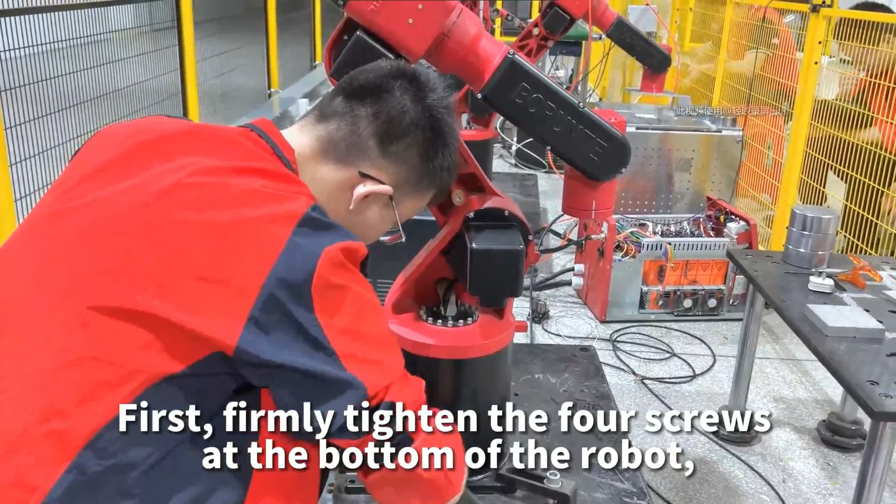Firmly tighten the 4 screws at the bottom of the robot. Open the crimp contacts protection cover. Connect the heavy load connecting line to the robot. Screw in and fix it. Complete the connection between the robot and the control cabinet.

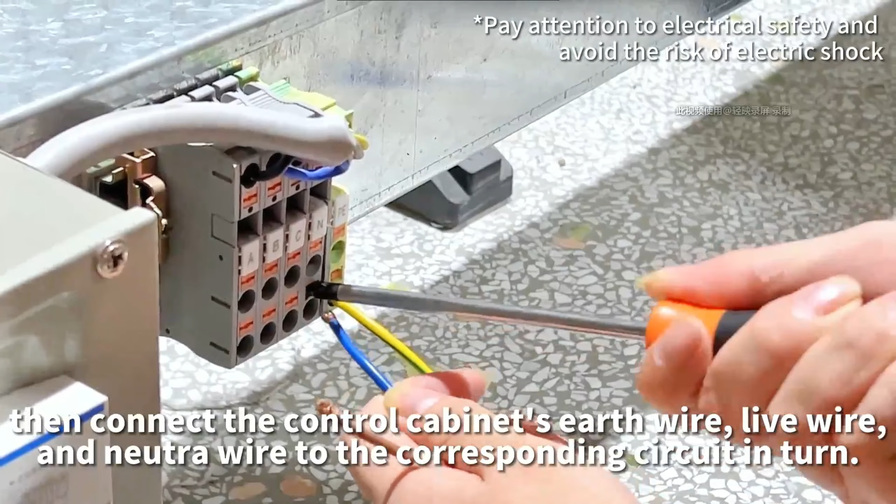Next, insert the teaching pendant connection cable into the teaching pendant connector on the upper right side of the back of the control cabinet and tighten it. Then connect the control cabinet's earth wire, live wire, and neutral wire to the corresponding circuit in turn. The connection between the robot and teaching pendant and the control cabinet is completed.

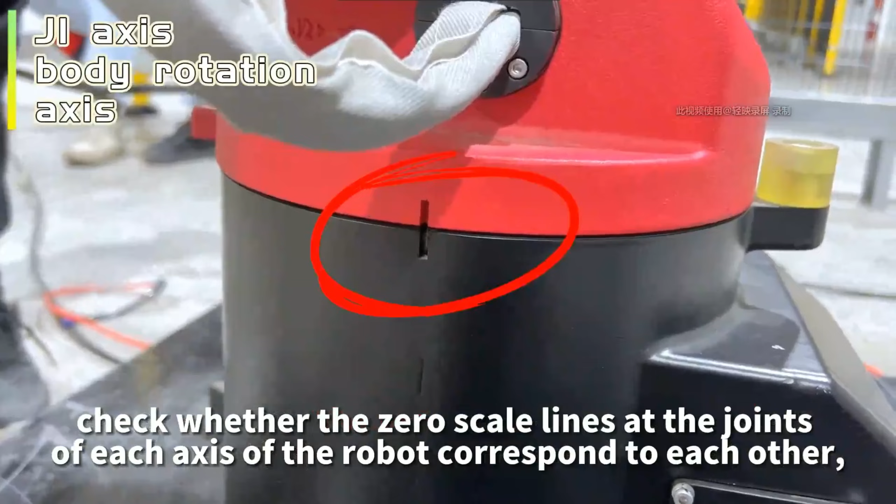Upward open the control cabinet switch. Wait for the teaching pendant to start and perform the home point resetting operation. Check whether the 0 scale lines at the joints of each axis of the robot correspond to each other. After checking, the robot can be used normally.

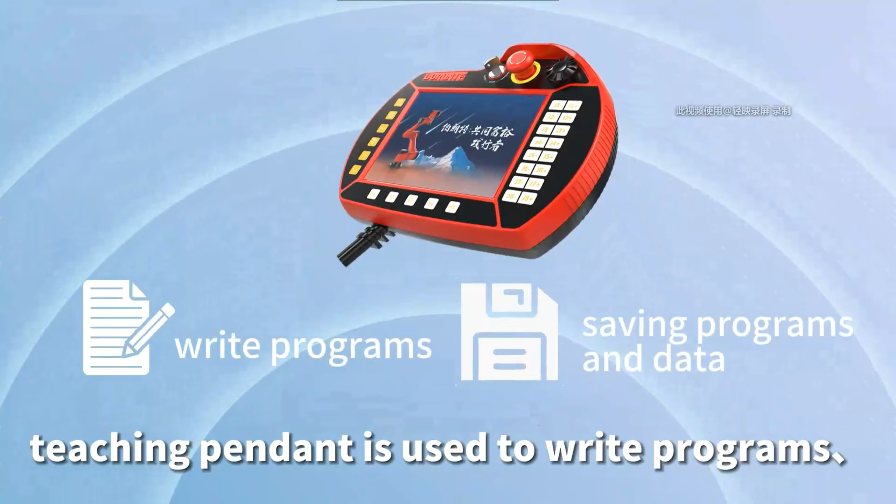Borunte robot includes robot body, teaching pendant, and control cabinet. The teaching pendant sends the demand to the control cabinet. The control cabinet will drive the robot moving based on the received signal. First, let's see the teaching pendant. The teaching pendant is used to write programs, saving programs and data.

At the left rear of the teaching pendant is a USB interface that can be used to transfer data, programs, etc. At the rear right is the Enable button. When writing a program, you need to press and hold the Enable button to move the robot. This is the front of our Borunte robot teaching device.

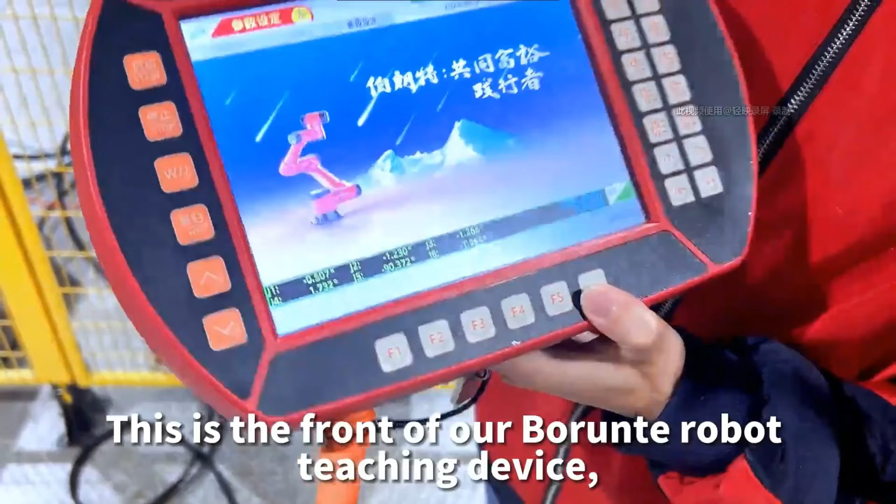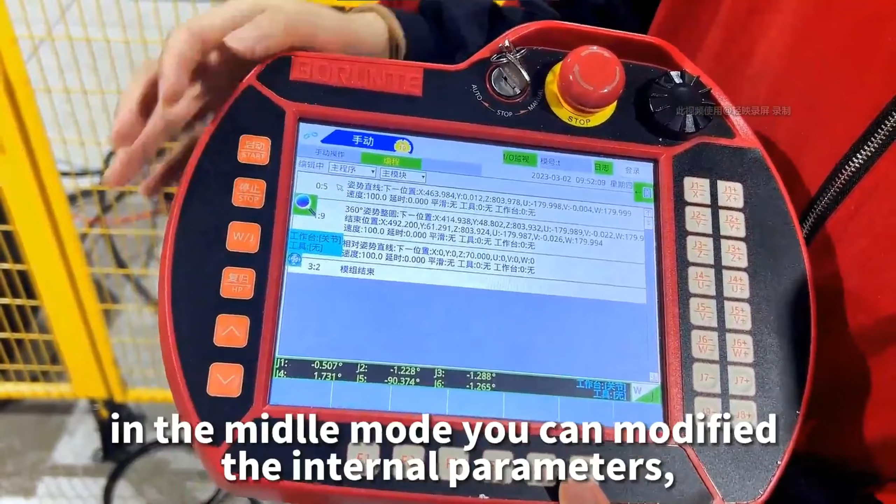The key can switch the operation status of the robot. There are 3 status keys in total. In the middle gear is our main interface. On the left is the automatic state. On the right is manual mode. In manual mode you can write and modify programs to move the robot. In the middle mode you can modify the internal parameters. In automatic mode, the robot can operate the program we need.

The red button next to it is the emergency stop button of our teaching pendant. Press it immediately in case of operation error. The robot will stop immediately. The black disc on the right is a fine-tuning knob. It can make subtle adjustments to the coordinates of each axis.

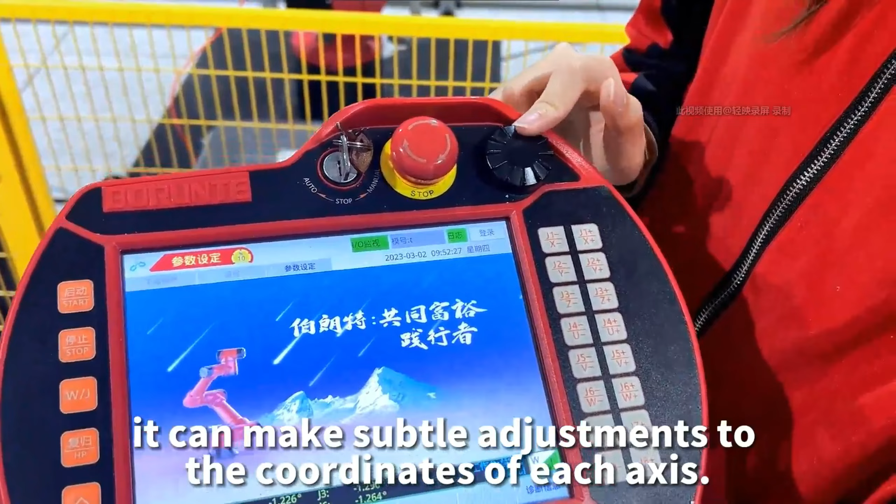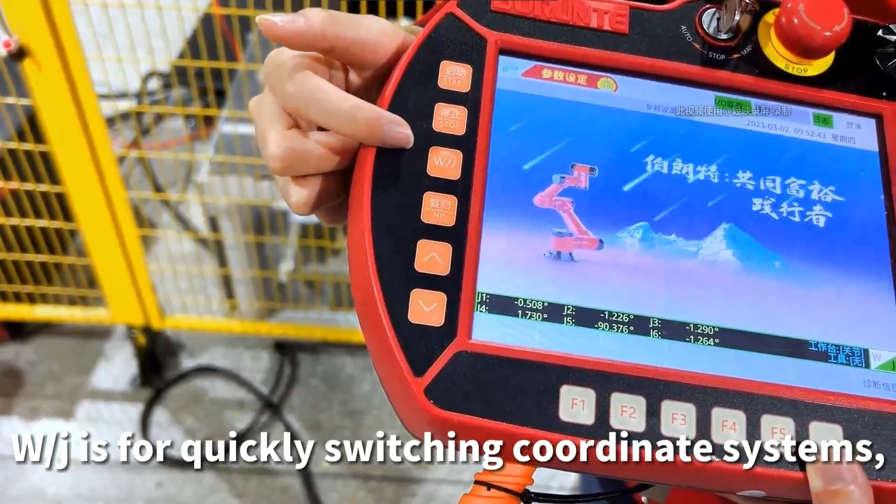The orange buttons on the left side are Start, Stop, WJ, Reset, Acceleration, Deceleration in sequence. Start and Stop buttons are used to control a written program and the operation of the robot. WJ is for quickly switching coordinate systems. W represents the world coordinate system. J represents the joint coordinate system. The reset button can restore robot actions to the robot standby point. The acceleration and deceleration buttons can control robot running speed.

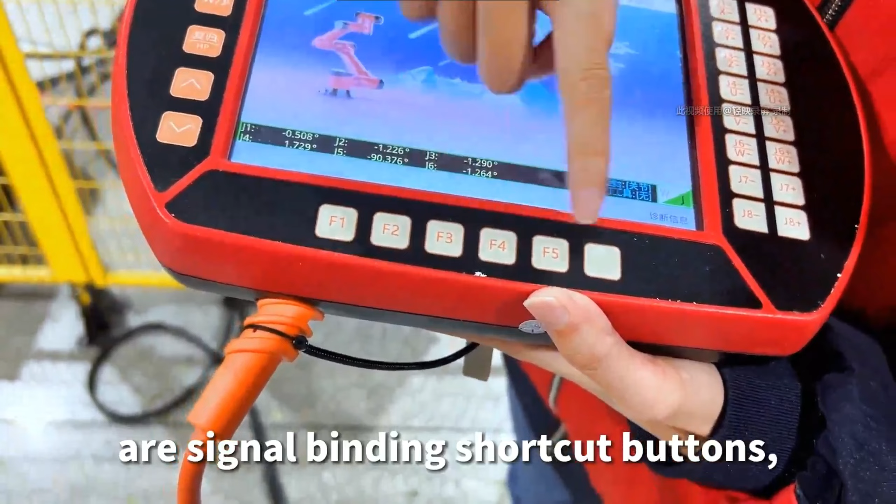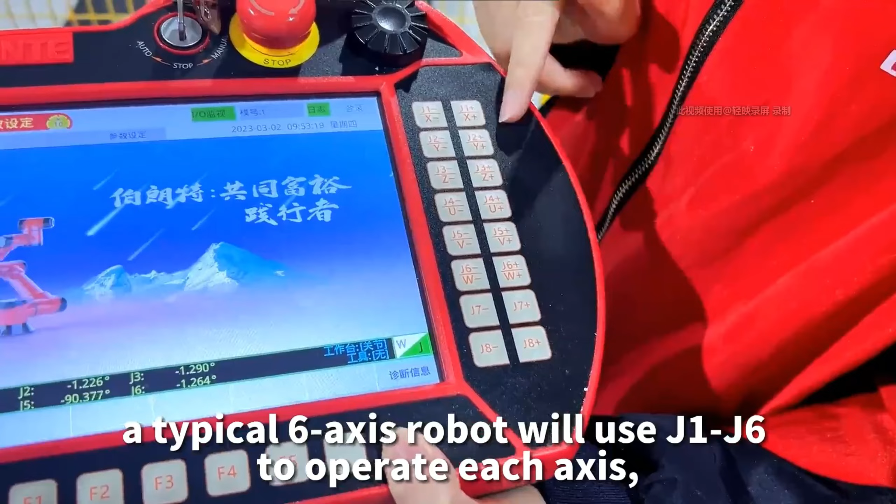F1 to F5 and the white button are signal binding shortcut buttons. They can be used to calibrate screen test keys or set custom function keys, acting as shortcut keys. On the right side, J1 to J8 are axis buttons, controlling the action of each axis. The teaching pendant can control 8 axes. A typical 6-axis robot will use J1 to J6 to operate each axis. J7 and J8 can bind additional axes.

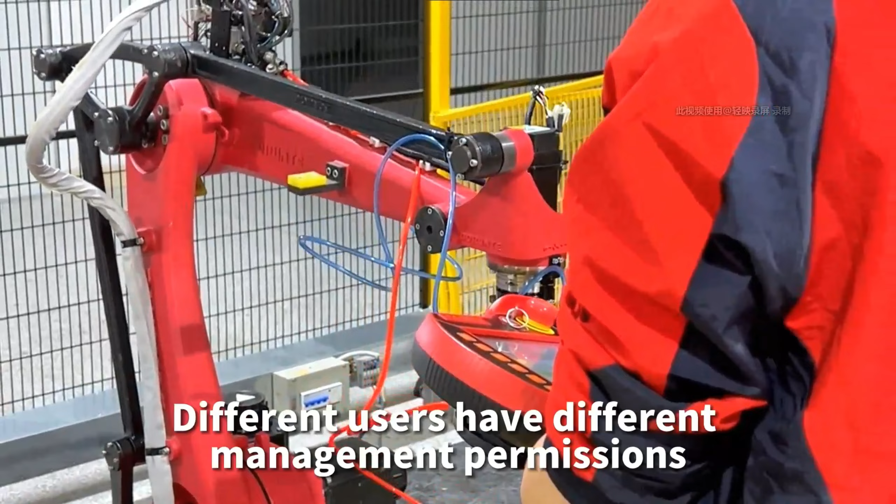The line below is the signal connecting line between the teaching pendant and control cabinet. There is a touch pen on the back for easy manipulation of the teaching pendant. The first step is login. You can operate the robot and set up the system after login. Different users have different management permissions.

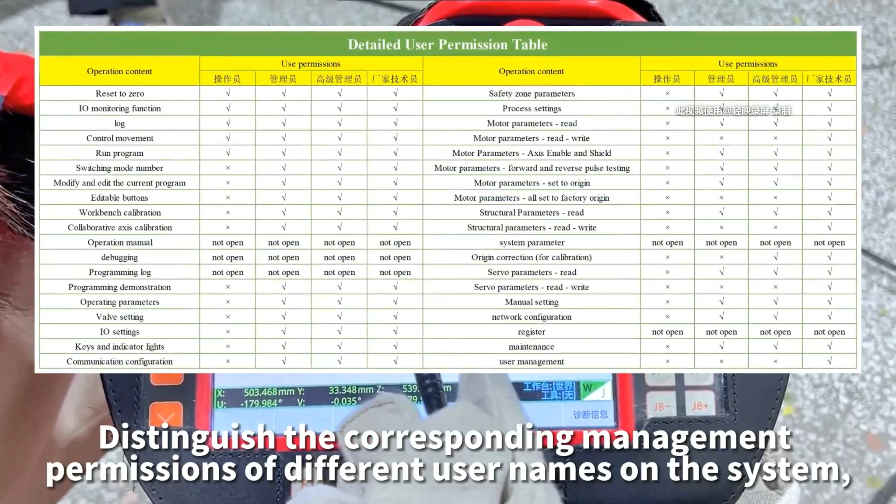Firstly, it is the home screen. Click Login. The first line is User. Click the black triangle. You can see several login methods that come with the system. The default passwords and permissions for our system are as follows. Distinguish the corresponding management permissions of different usernames on the system. Refer to the following figure for details.

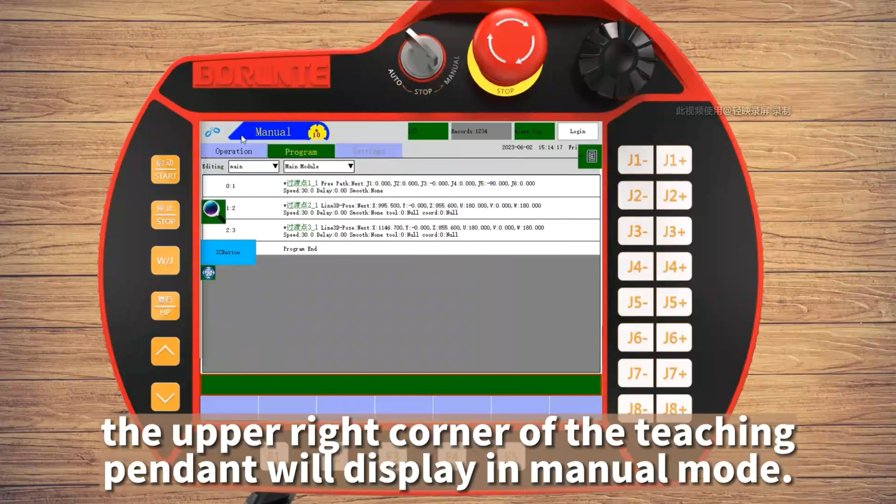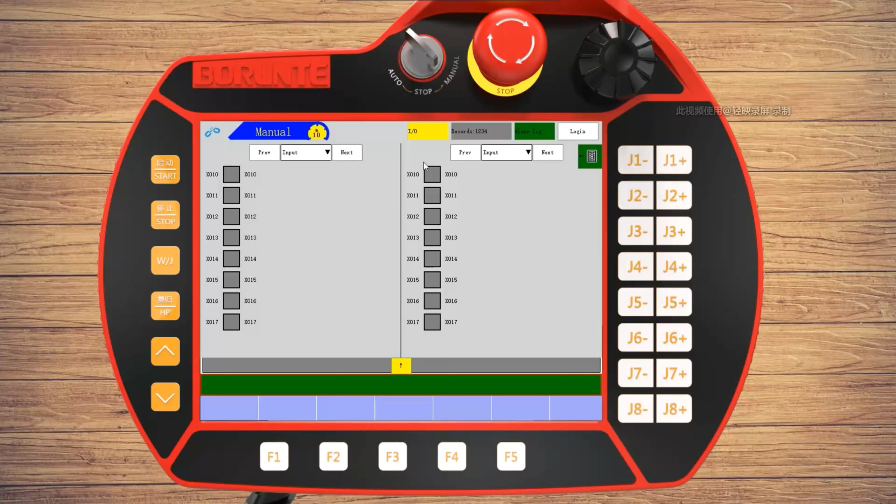First, shift the key to manual gear. The upper right corner of the teaching pendant will display manual mode. Next, let's take a look at I/O monitoring. This monitoring page allows for real-time viewing of monitoring related information, including input and output, intermediate variables, servo monitoring, data in memory, welding data, and so on. Click I/O monitoring to pop up the window. Click again to retract the window.

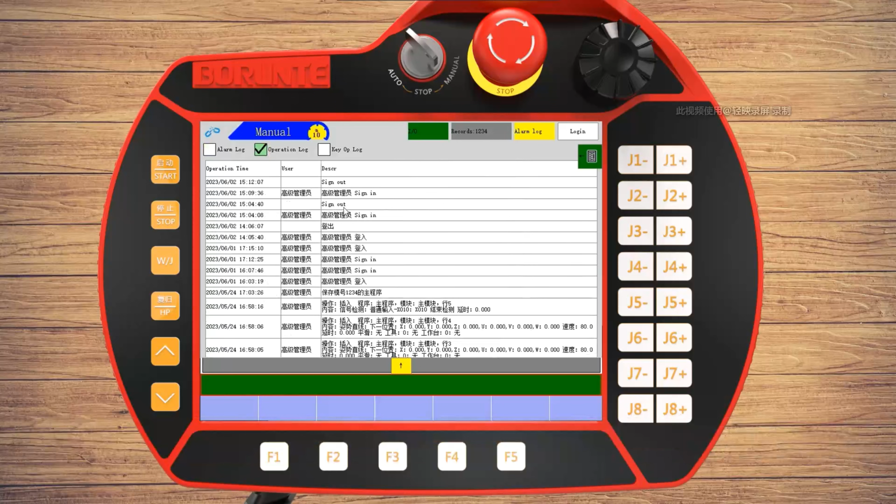Secondly, we can check monitoring information in the logs. Here we can monitor alarm records, operation records, and button records. The alarm record page records information on robot abnormal alarms. The operation record page records operational records. Key recording page.

Record button or switch operation records. Same as I/O monitoring. Click on the log again to zoom back to the programming page. If you want to view or modify the module number, clicking on the module number directly is not allowed to view it. We need to log in first.

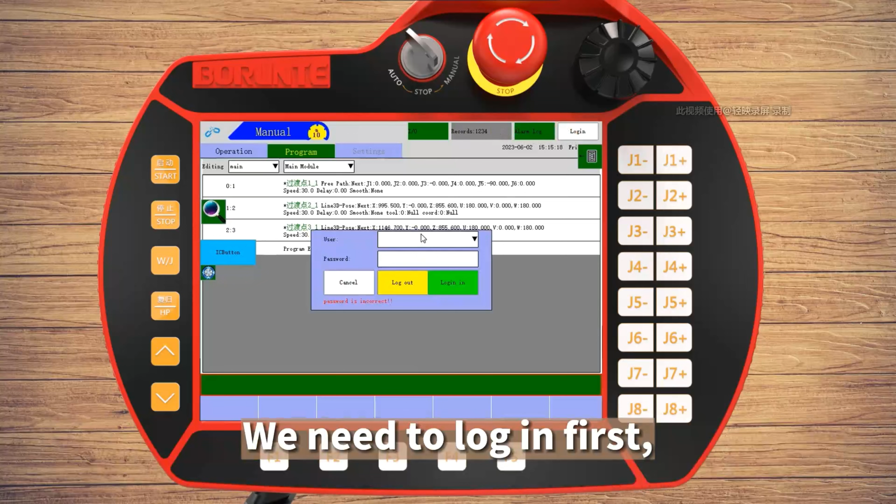User select Senior Administrator. Password 1, 2, 3, 4, 5, 6. After logging in, we can view or operate on the module number. For example, creating a new module number or loading a module number. We can also import the module number from USB or export the module to USB.

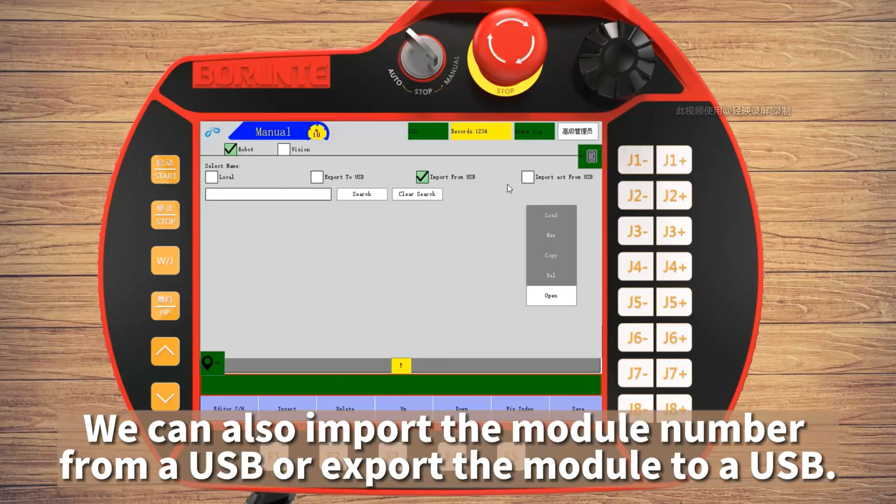Click on the module number again. Return to the programming interface. In the programming interface, you can view and write programs. We will explain it in detail in the upcoming class content.

The robot joint coordinate system is used to control the motion of each joint, and different robot joint types also vary. We can switch coordinates through the WJ button on the left side of the teaching pendant. J represents joint coordinates. W represents world coordinates.

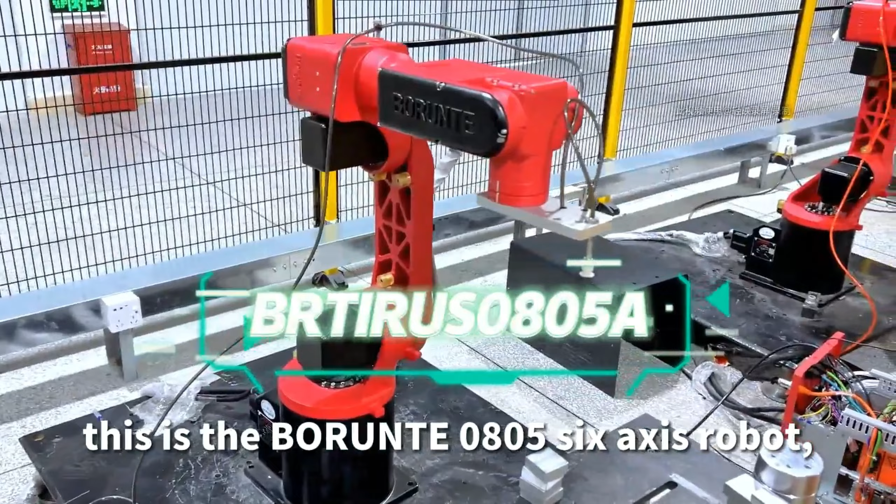Next, let's practice. This is the BORUNTE 0805 six axis robot. First, log into the Senior Administrator and turn the key to manual mode. We can see that the workbench on the left displays world coordinates. Click the WJ button to switch to joint coordinates. Now, we can operate the J1 to J6 buttons on the right side of the teaching pendant through the Enable button to operate the corresponding axis.

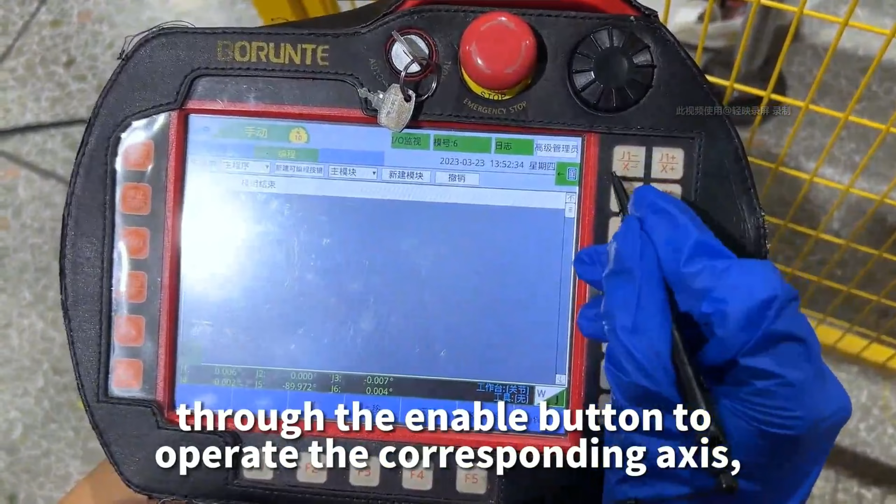We can see that its one axis has a degree of freedom of plus or minus 170 degrees. Its two axis has a degree of freedom from minus 98 degrees to plus 80 degrees. Its three axis has a degree of freedom from minus 80 degrees to plus 95 degrees. Its four axis has a degree of freedom of plus or minus 180 degrees. Its 5 axis has a degree of freedom of plus or minus 120 degrees. Its 6 axis has a degree of freedom of plus or minus 360 degrees.

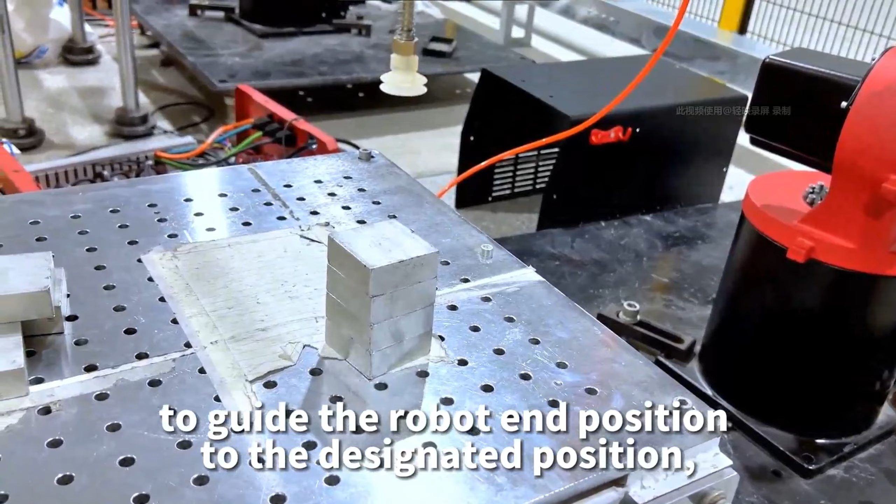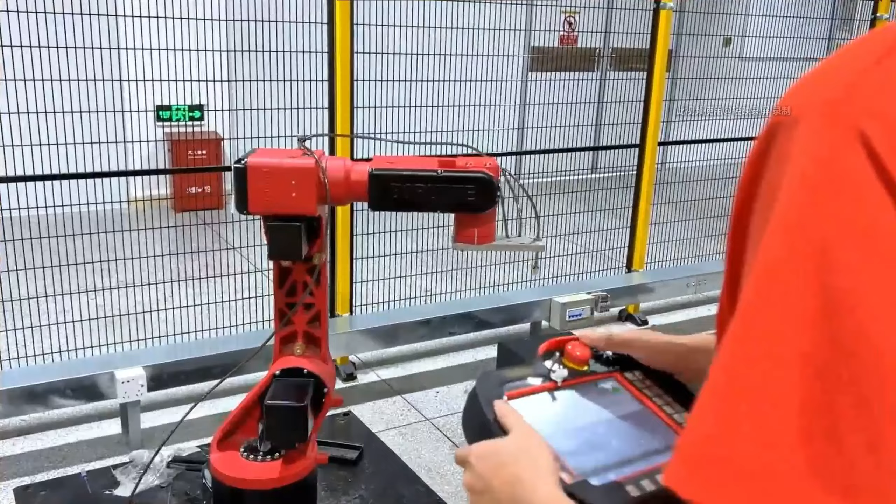If you want to move the robot end position to the desired position in the joint coordinate system, it can sequentially move each joint to guide the robot end position to the designated position. Take the one-axis joint movement as an example. We can set a starting point first. Click Set the End Point. Click Insert. Press J1+. Turn the robot to the point where we need it. Click again to set the end point. Click Insert. Then we come to the automatic interface and run the robot motion between the points we just wrote. We can see that one axis has already repeated its work according to the path we have set up.

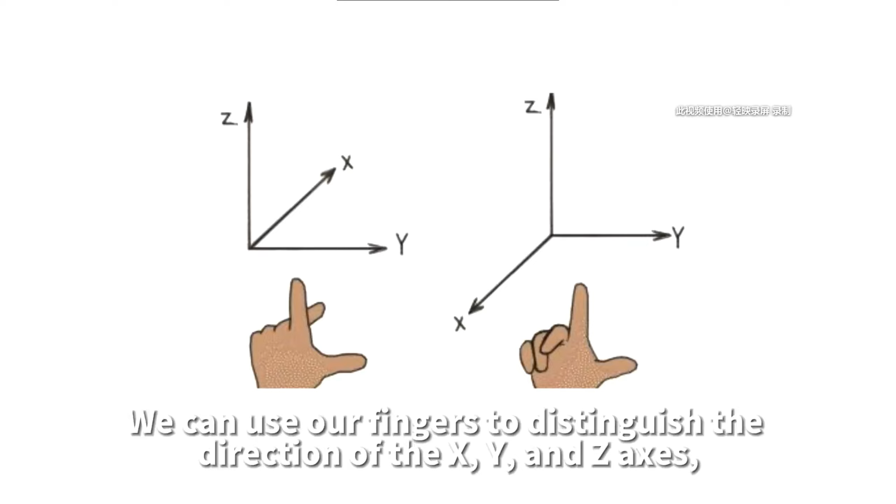The Cartesian coordinate system is used to describe the movement of the robot body based on the robot mounting base. This coordinate system is composed of the mutually perpendicular x, y, and z axes. It is the basic coordinate system necessary for robot motion in three-dimensional space, and it is also the most commonly used coordinate system. We can use our fingers to distinguish the direction of the x, y, and z axes.

The operator faces the robot and extends the left hand to gesture, with the middle finger facing yourself. The middle finger represents the x-axis for controlling the forward and backward robot motion. The index finger is horizontal, representing the y-axis for controlling the left and right robot motion. The thumb is facing upwards, representing the z-axis for controlling the up and down robot motion.

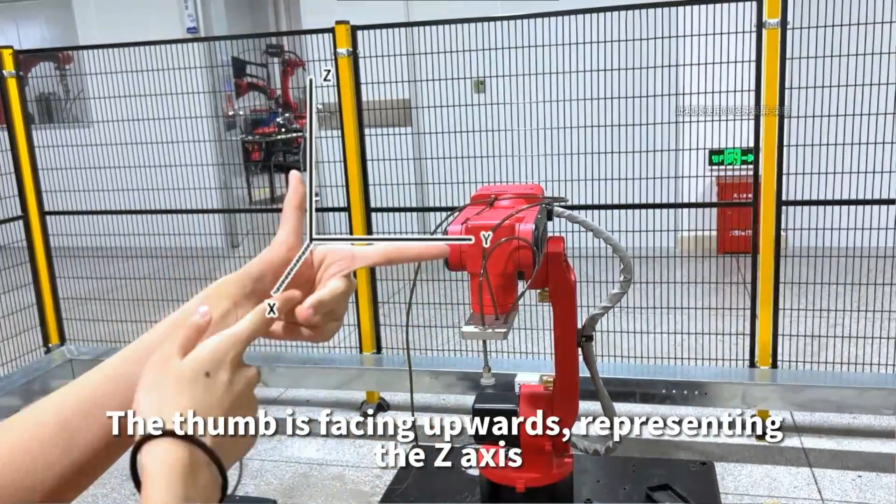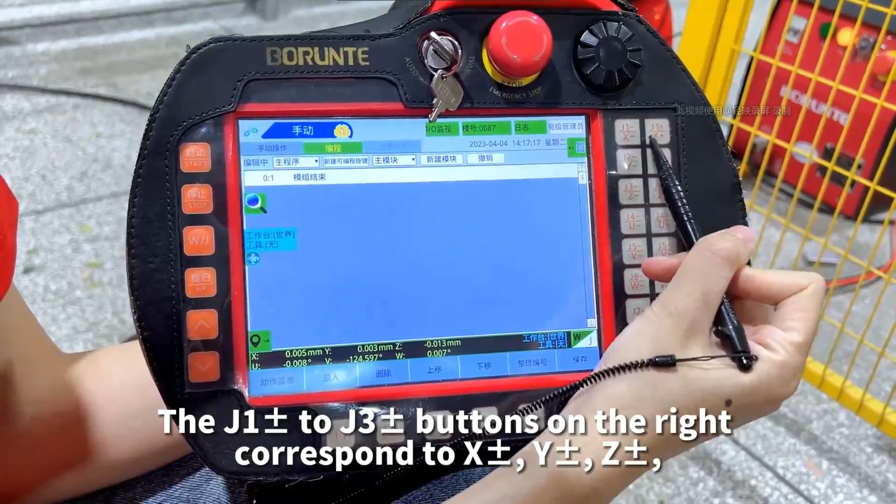Next, enter the practical operation. Turn the teaching pendant to the manual interface. We can see that the workbench on the left usually defaults to the world coordinate system. If not, we can switch through the WJ button. The positive and negative J1 to J3 buttons on the right correspond to positive and negative XYZ.

X negative is for controlling a backward robot movement. X positive is for controlling a forward robot movement. Y negative is for controlling a leftward robot movement. Y positive is for controlling a rightward robot movement. Z negative is for controlling a downward robot movement. Z positive is for controlling an upward robot movement.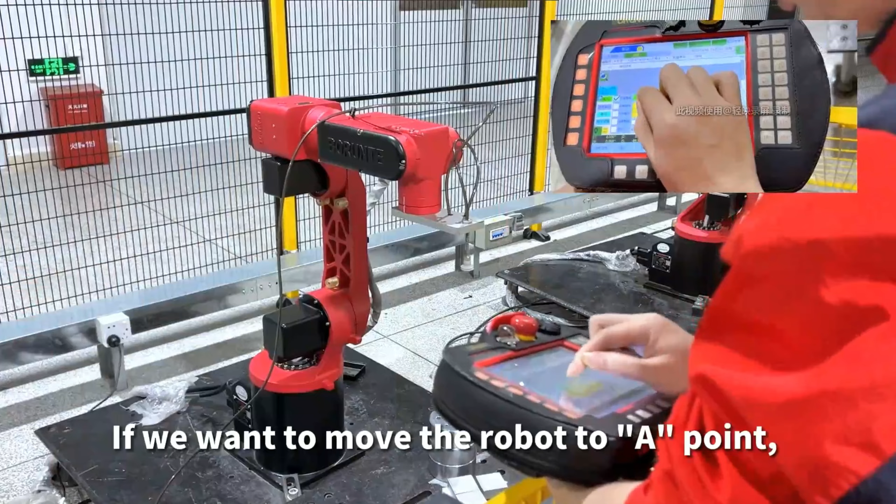If we want to move the robot to point A, first, set an initial position, click Set the End Point, click Insert. Then we use world coordinates to move the robot to point A. Click Set the End Point again, click Insert. Turn to the automatic interface to move. This is how the robot motion between points is achieved through world coordinates.

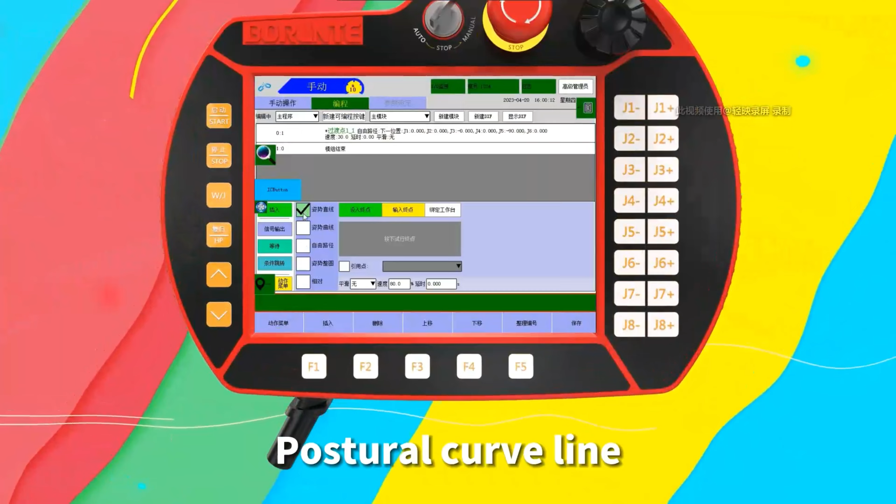An instruction can be understood as a control command that enables a robot to move to a specific position. The motion instructions of the BORUNTE robot are mainly divided into 5 types. They are posture straight line, posture curved line, free path, posture rounding and relative instruction.

Before learning the specific contents, we have to know the 3 factors affecting instruction speed. The first factor is axis speed. Axis speed refers to the maximum speed set by the servo of each joint of the robot. It can be found in the product introduction on the official website or the product technical recommendation.

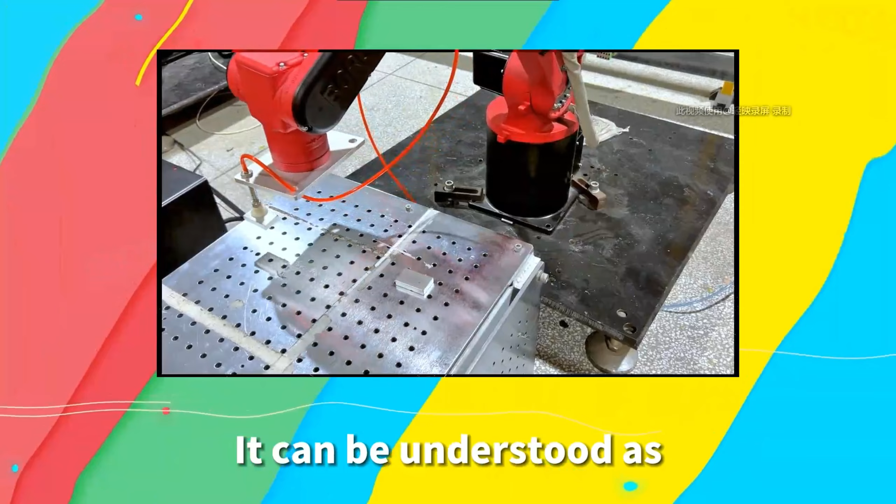The second factor is path speed. Path speed refers to the speed multiplier set in a single path program line. It can be understood as, when the robot is moving on a trajectory, the percentage of axis speed on this trajectory. The path speed can be modified when path programming.

The third factor is speed multiplier. It is the percentage of the robot's entire speed. We can click on the upper left corner of the teaching pendant to view it. The default setting is 10%. That is 10% of the robot's axis speed, which can be changed according to actual application scenarios.

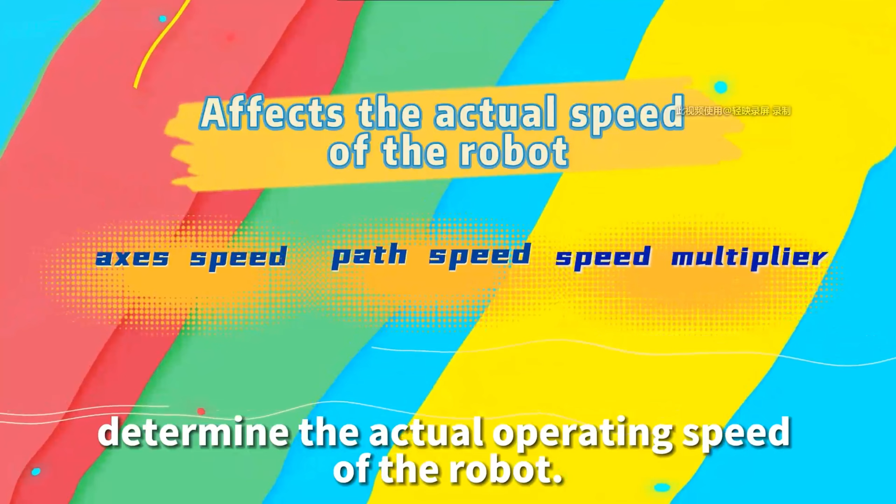The above 3 factors: axis speed, path speed, speed multiplier determine the actual operating speed of the robot. When we want to measure the actual speed of a robot at a certain joint or in a straight line, we can use maximum speed multiply path speed multiply speed multiplier. This formula is used for calculation. During normal operation, we can control the speed of robot movement by changing the path speed

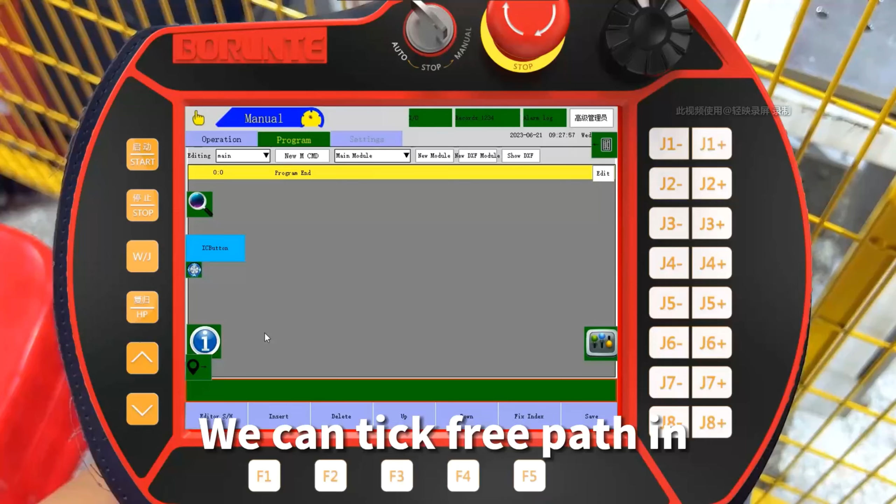or speed multiplier. Free path uses the joint interpolation method to move to the teaching position. The speed of each joint follows: axis speed multiply path speed multiply speed multiplier. To operate, we can tick free path in editor, path. To operate robot movements, the right option box contains all parameter settings for free path.

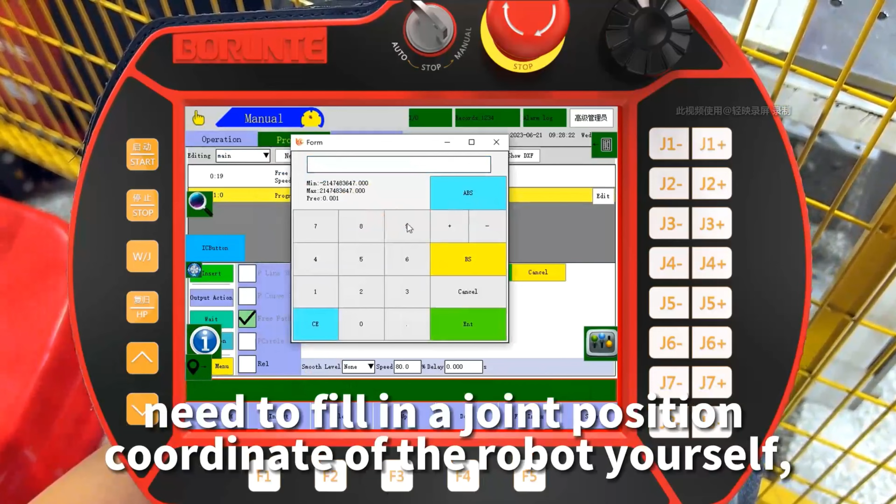We can first look at the 2 options above: set endpoint and input endpoint. Set endpoint directly records the current joint position coordinates of the robot. Input endpoint needs you to fill in a joint position coordinate of the robot yourself. These 2 methods are selected and used according to the actual scenario needs.

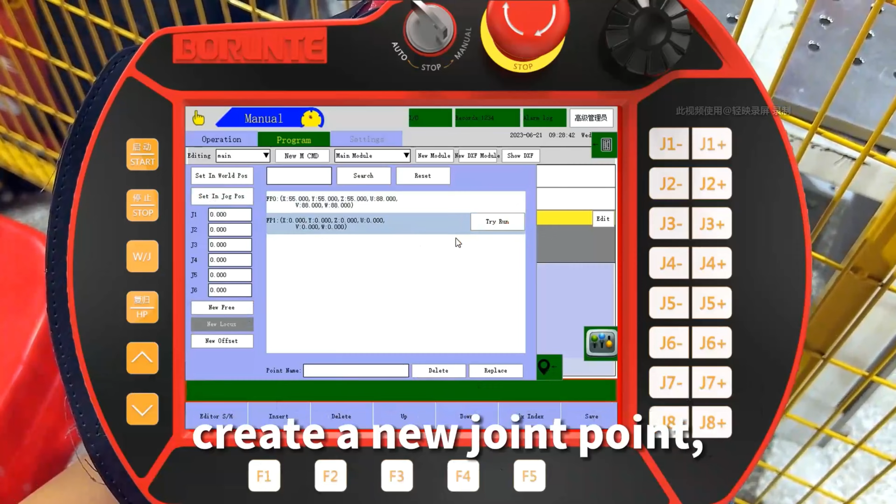Below there is select point. It can reference previously created joint positions. After ticking, directly insert the point data. We can enter the point setting interface by clicking the green button in the bottom left corner. Click Set in Joint Position. Create a new joint point, and we have recorded a reference point.

Smooth level refers to the smoothness of the connection between points during the robot's movement process. Default is no smooth. We can see that when the smooth level is none, the robot will move to the set point position and then move to the next point. After setting smooth level, the robot will transition the set points in a smooth manner. It can reduce pauses between points.

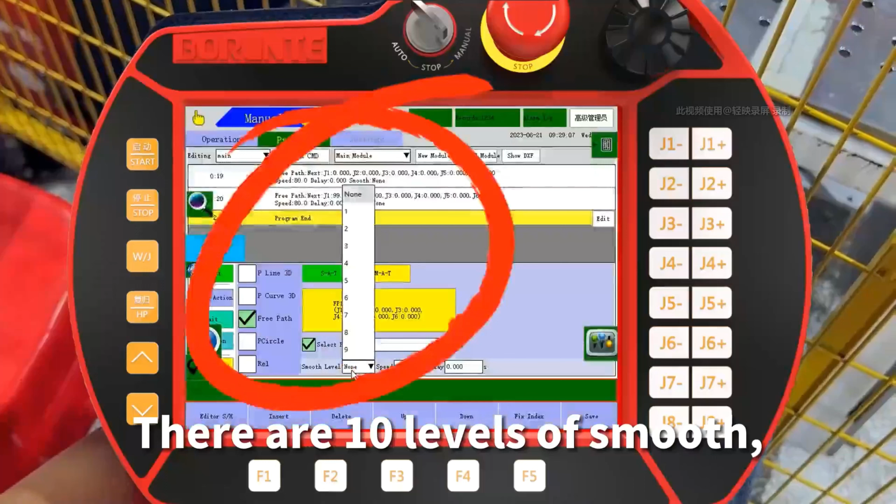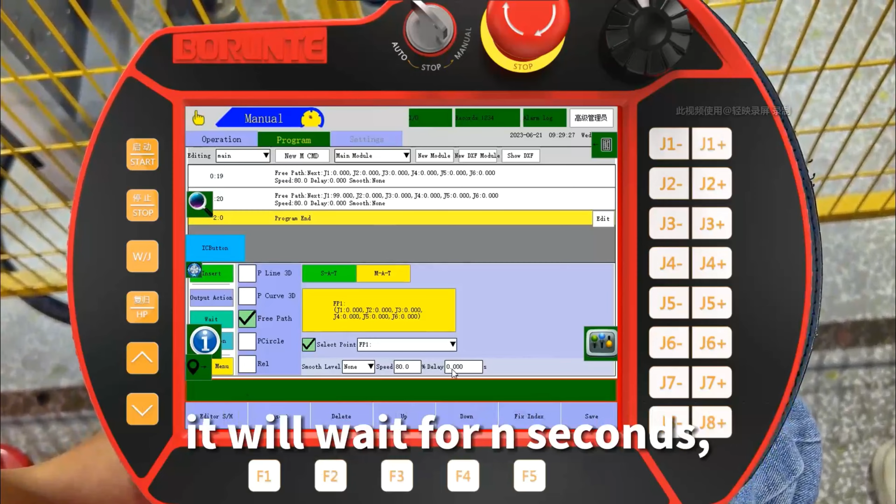There are 10 levels of smooth. The higher the smoothness, the lower the accuracy of the trajectory. The robot moving position is most accurate when there is no smooth. The speed is the path speed. It is the speed multiplier set in the single path program line. Delay is when the robot reaches the finish point, it will wait for n seconds. The default is 0 seconds. Above are all the parameter settings for the free path.

When choosing free path, it is necessary to pay attention to its motion trajectory characteristics. It is actually presented as an arc, but if the 2 points you set are in a straight line and you choose free path, the final effect presented is still an arc. It is because there is only an angle operation relationship between the points in the free path.

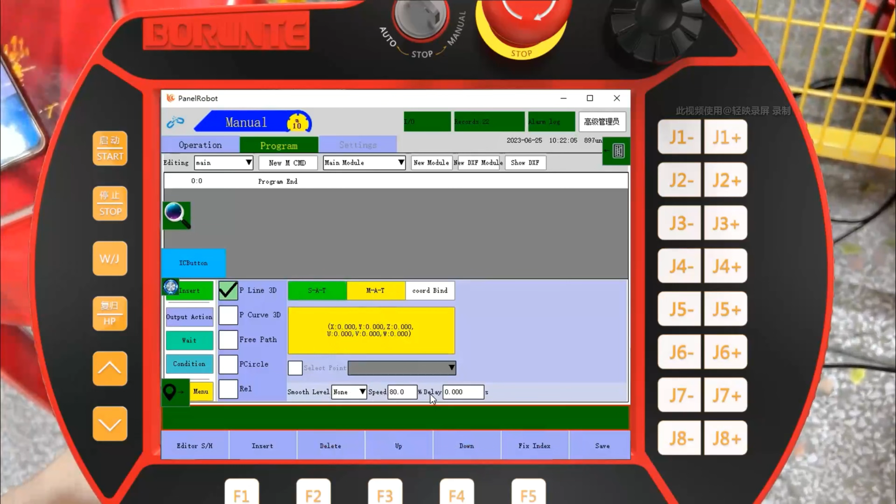The posture line is also the most commonly used instruction in motion commands. It uses the linear interpolation method to move to the teaching position. The speed follows: maximum linear speed multiply path speed multiply speed multiplier. To operate, we can tick posture line in editor, path. The right option box has set endpoint, input endpoint, smooth level, speed, delay, select point: 6 parameter settings. Tick input endpoint.

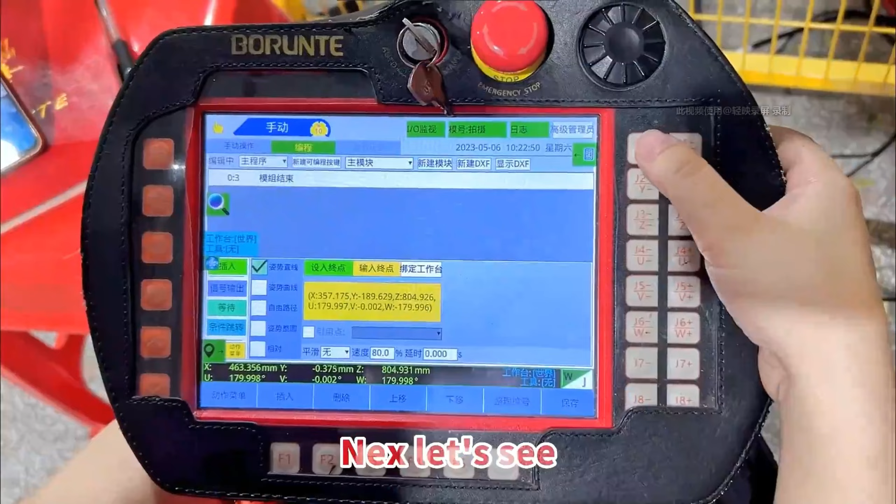The interface displays the settings of the X, Y, Z, U, V, and W coordinate axis parameters. Except that the axis parameter display is different from the joint parameters in free path, all other parameter settings are consistent with the definition in the free path. Next, let's see the actual trajectory effect presented by the posture line.

Let's first move the robot to the desired starting point through teaching. Tick posture line in program editor, tick set endpoint, and insert it. The starting point is set, and write an endpoint using the same operation. After writing, let's make it run automatically to observe its trajectory.

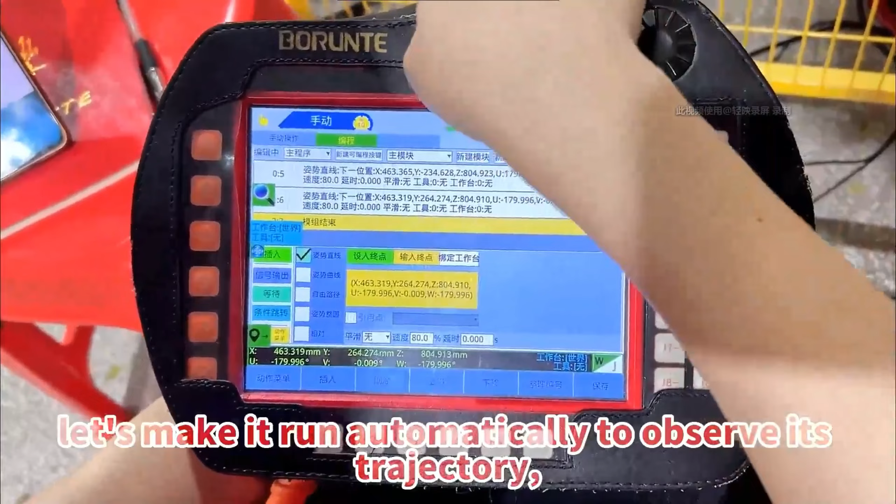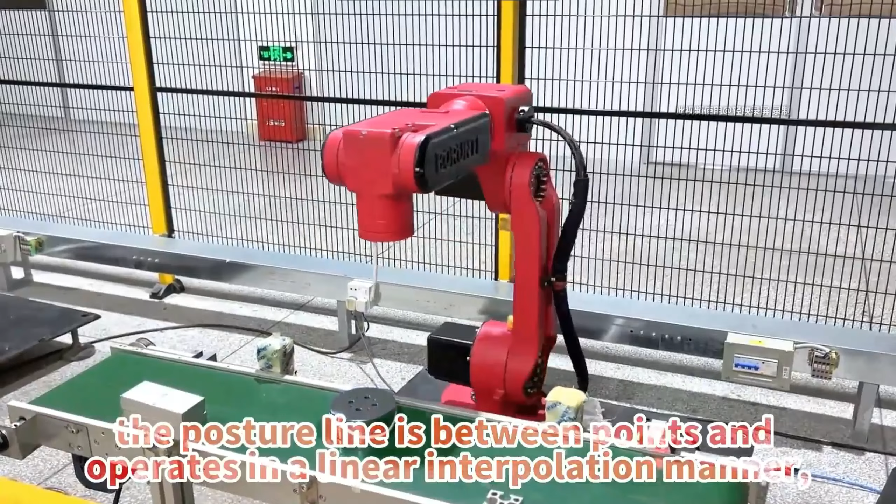The trajectory characteristics of posture line and free path are different. The posture line operates between points in a linear interpolation manner, so its trajectory features a straight line. The main factors that affect the robot's straightness are the deceleration ratio, link parameters, origin point and motor rotation direction. If the above parameters are incorrect, it will cause the robot to walk in a straight line imprecisely or produce tilting phenomena to the teaching position.

The speed of each joint follows maximum linear speed multiply path speed multiply speed multiplier to operate. 3 points can determine an arc. If you want to maintain robot posture path in an arc, you need to establish a tool coordinate system to ensure the accuracy of trajectory during arc transformation posture.

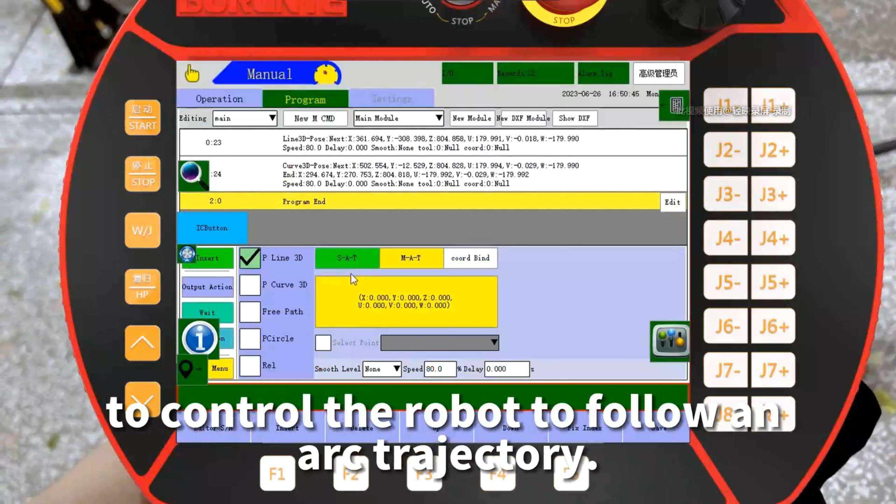We can tick posture curve in program editor S/H path to control the robot to follow an arc trajectory. The right option box asks select point, smooth level, speed, and delay. Setting has the same definition with free path. Setting the posture curve, need to determine 3 points. They are start point, midpoint, and end point. 3 points form a complete curve.

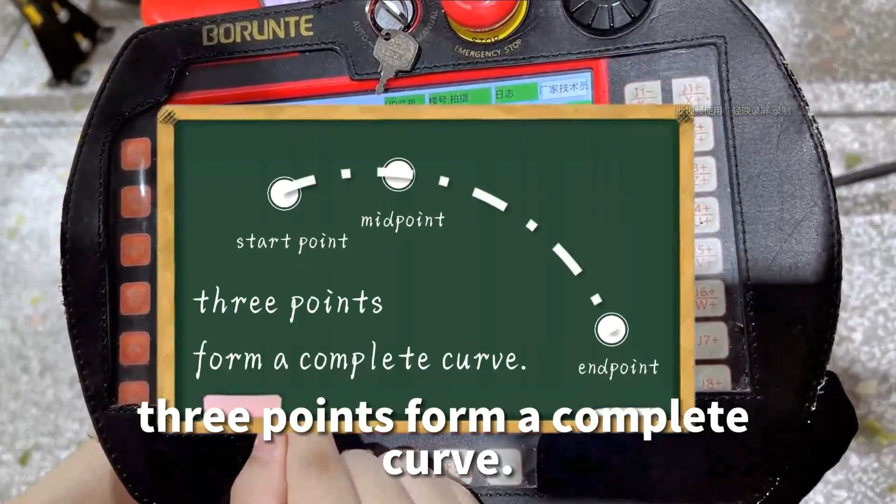First, the start point can be determined through a free path or posture line. Then tick posture curve, set or input point information for midpoint and endpoint. After determining the information of the 3 points, we can test the motion trajectory of the robot.

2 points need to pay attention when setting posture curves. 1. Setting a continuous curve doesn't require setting a start point again, because the end point of the previous curve is the start point of the latter curve. 2. When setting curve with posture or continuous curve, it is necessary to choose the tool coordinates with accurate calibration. Without selecting tool coordinates, it is impossible to create a posture curve effect.

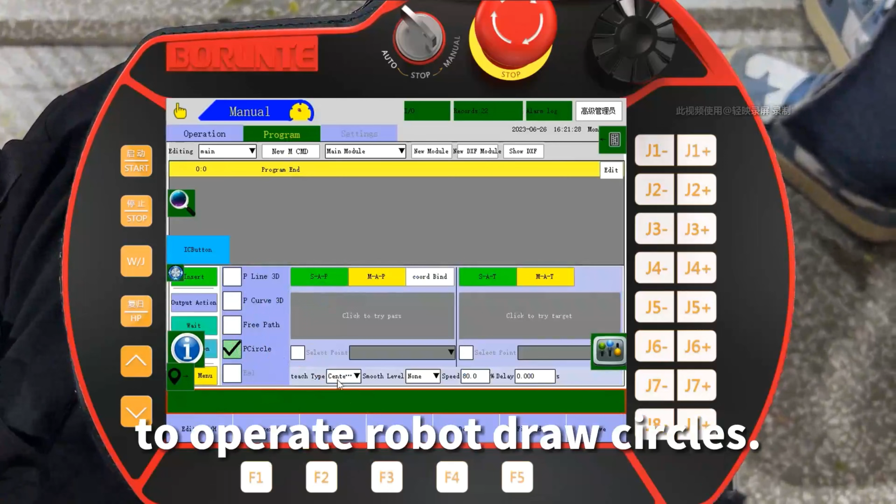Circle is using full circle interpolation method to realize a complete arc trajectory. The speed of each joint follows maximum linear speed multiply path speed multiply speed multiplier to operate. We can tick posture circle in program editor S/H path to operate robot draw circles. There are 2 methods to set posture circle, 3-point way and the center way.

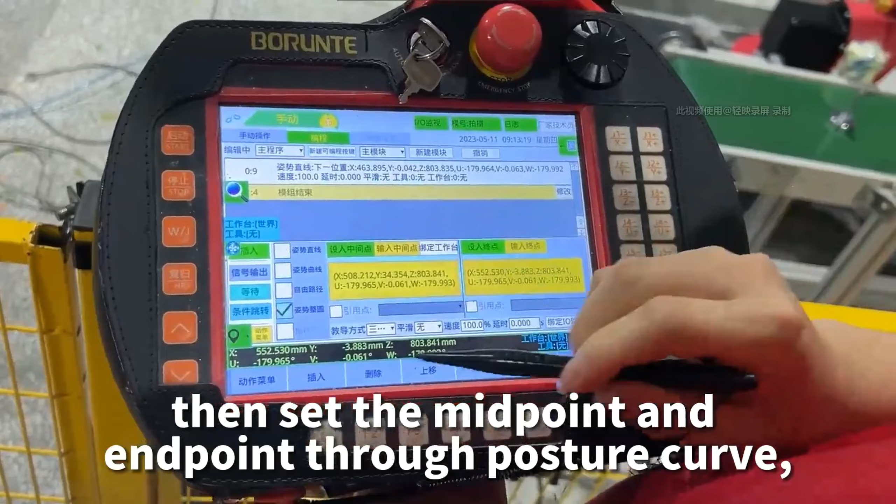The 3-point way is to determine a circle based on 3 points. Its operation method is consistent with the posture curve. It is also set the start point through posture line or free path, then set the midpoint and end point through posture curve. These 3 points can form a complete circular trajectory.

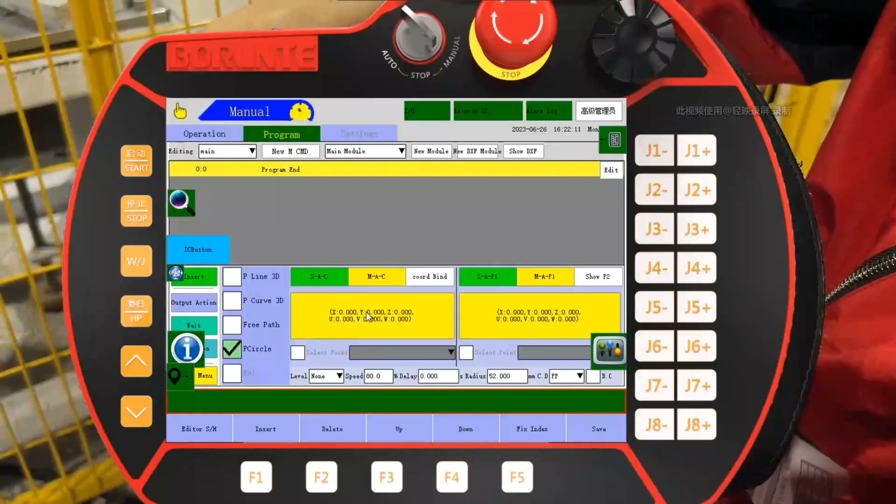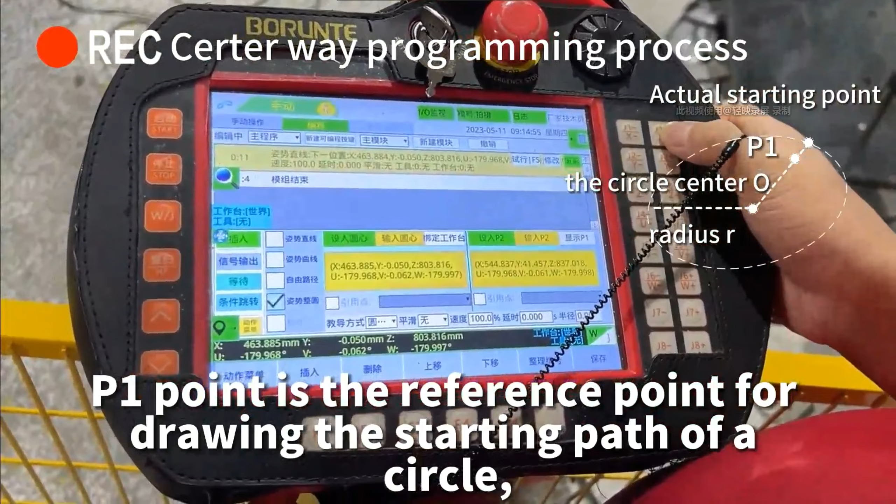P1 point is the reference point for drawing the starting path of a circle. P2 point is the reference point of the screen plane. There are clockwise and counterclockwise directions. Default is clockwise. Returning to circle center at the end refers to the robot automatically returns to the center position after drawing a circle. Default is not returned. You need to tick this option to return.

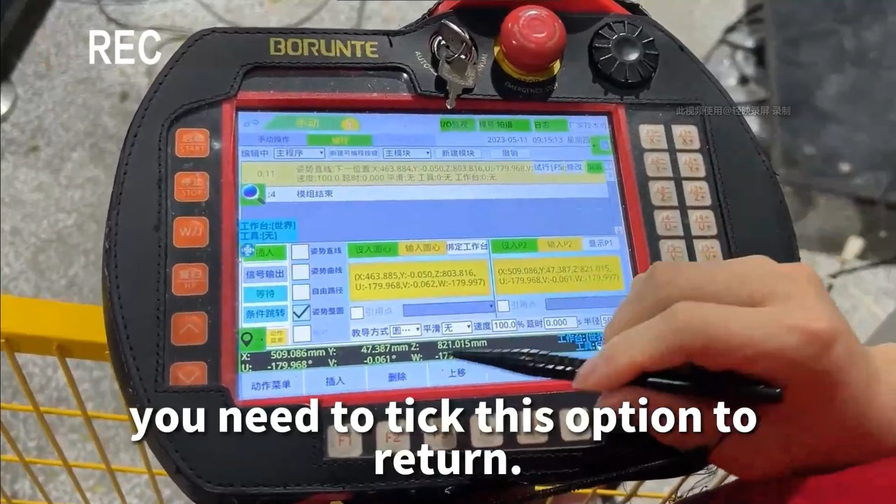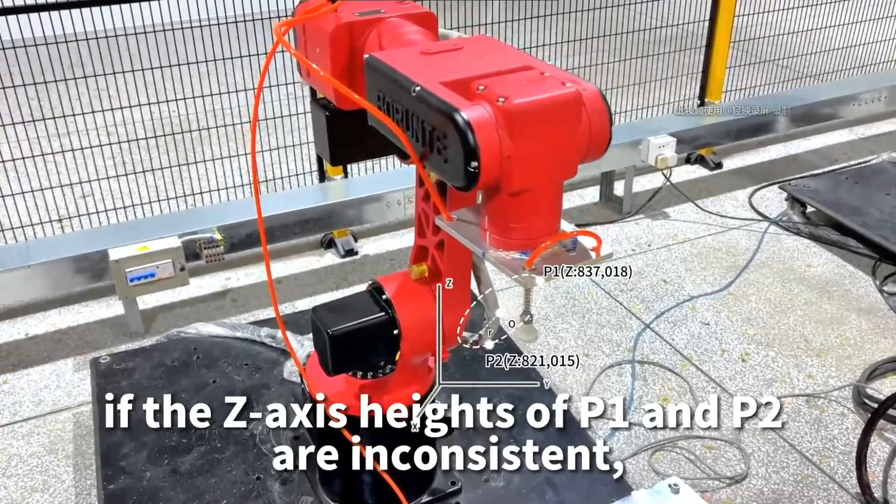After setting the above parameters, robot will start from the circle center, run in the direction of P1 to the radius point, and draw a circle clockwise in the plane determined by the center of the circle and points P1 and P2. It should be noted that if the z-axis heights of P1 and P2 are inconsistent, robots can walk on an inclined plane. The above parameters need to be set in the world coordinate system.

The relative instruction is for the robot to move in its current position based on the relative value of the motion mode. We can tick relative and posture line or posture curve line or free paths in editor S/H path to operate the robot in relative motion. Here, we cannot select input the point position in the point position setting of relative instruction. We can only fill in the input point position manually.

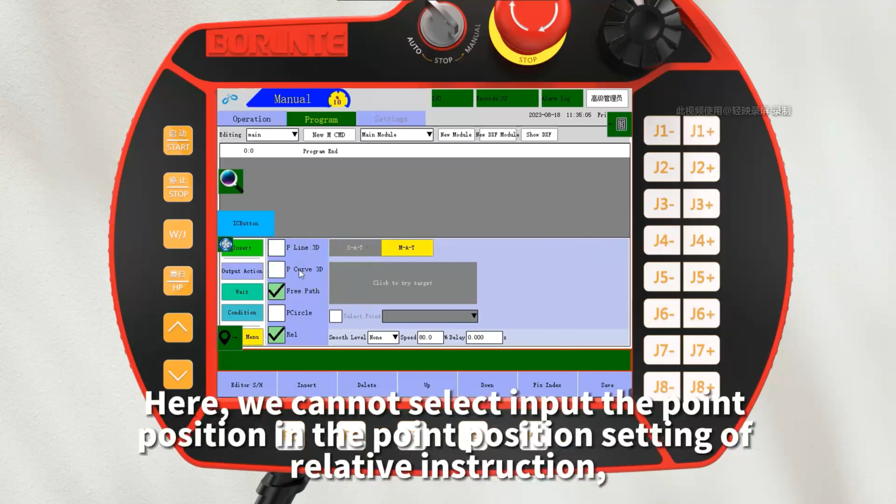We must review and understand the previous courses on setting up posture lines, posture curve line, and free paths in advance. Relative instructions combine the operating characteristics of 3 motion instructions. Calculate the specific motion position of the point by inputting the relative value data of the point, thereby achieving the relative point motion of the robot.

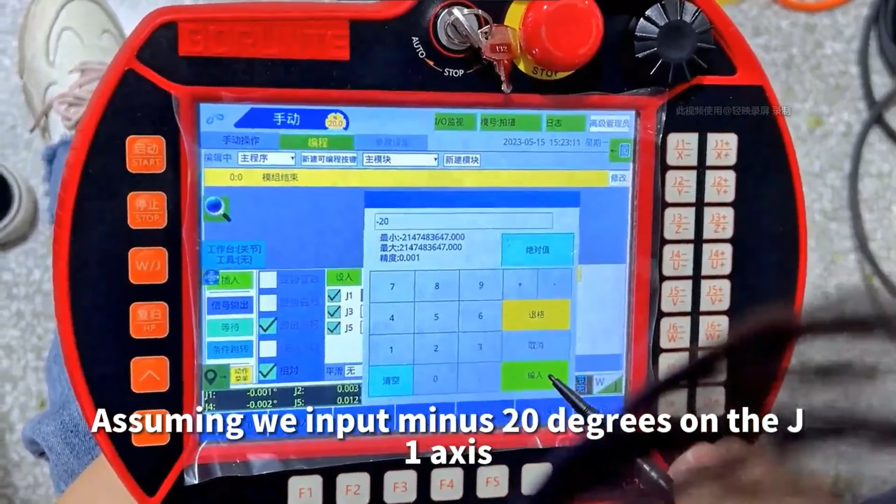For example, the relative free path. Tick relative and free path, and click on the right input the endpoint option box. Here will appear the setting of J1 to J6. Assuming we input -20 degrees on the J1 axis, and input 20 degrees on J5 axis, to test run the program.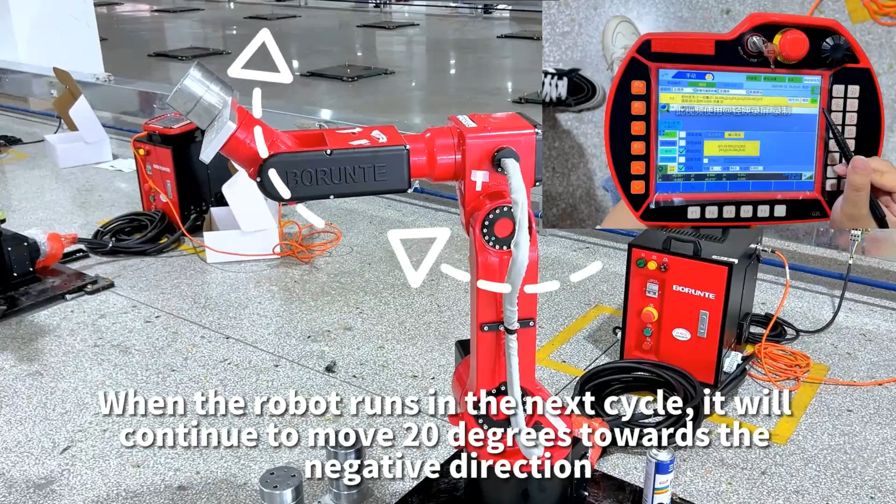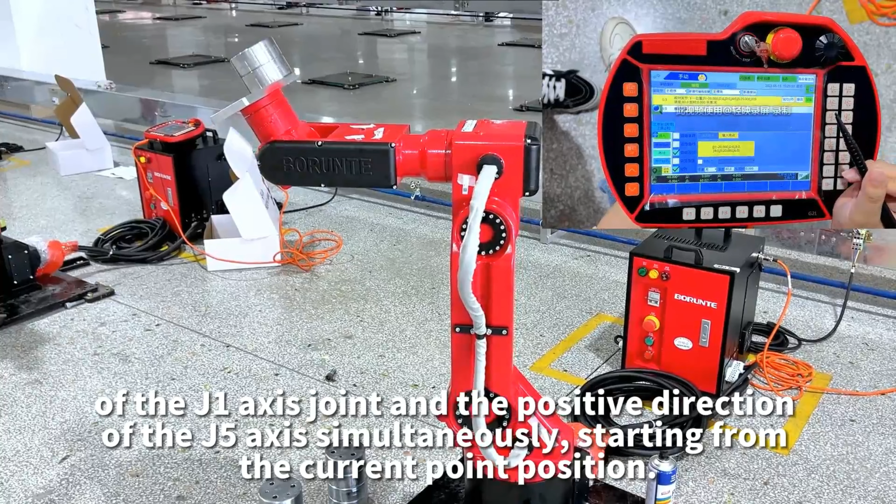The robot will move 20 degrees in both the negative direction of the J1 axis and the positive direction of the J5 axis, based on the current point position. When the robot runs in the next cycle, it will continue to move 20 degrees towards the negative direction of the J1 axis joint and the positive direction of the J5 axis simultaneously, starting from the current point position. This is the relative free path.

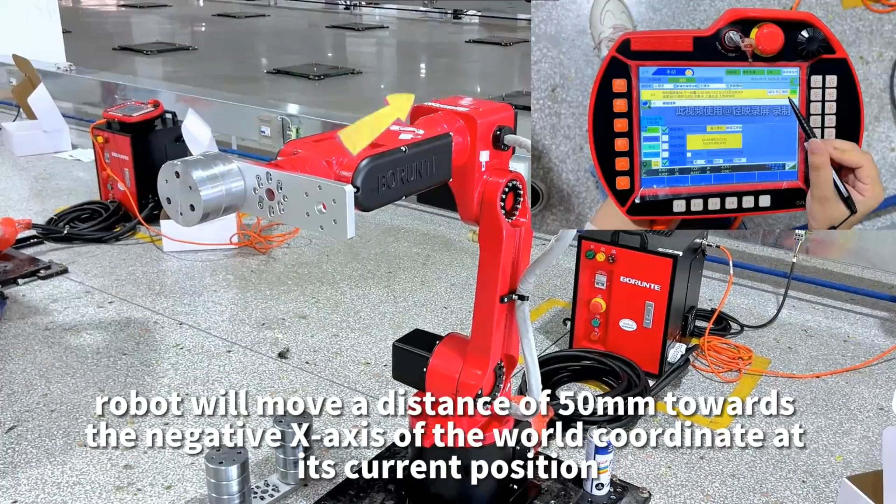Next one is relative posture line. Tick relative and posture line. Similarly, input the relative value for setting the endpoint. Assuming we input -50 on the x-axis, the robot will move a distance of 50 millimeters towards the negative x-axis of the world coordinate at its current position. If you want the robot to move a relative gesture, you can run the robot to move in a relative gesture by setting the relative values of the u, v, and w axes.

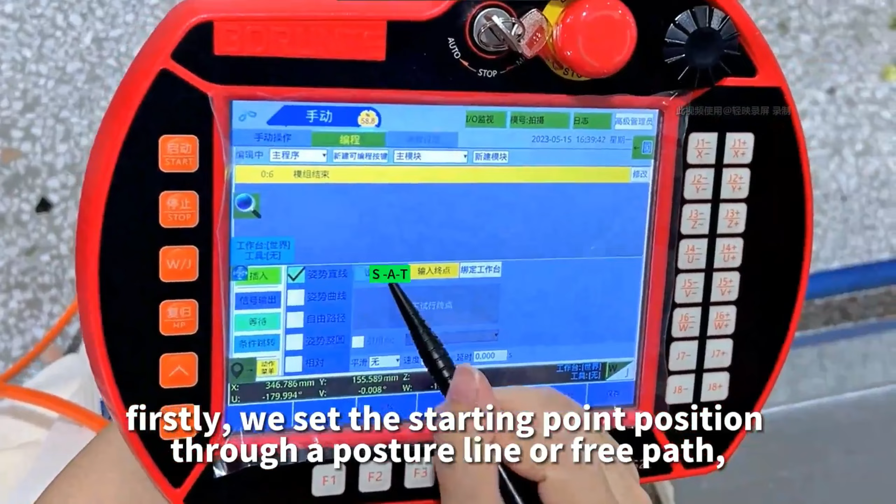The same operation applies to relative posture curve line. Firstly, we set the starting point position through a posture line or free path. Then tick relative and posture curve line. Click input midpoint and endpoint. Input the relative value of the point position on the XYZUVW axis. Finally, test run the robot.

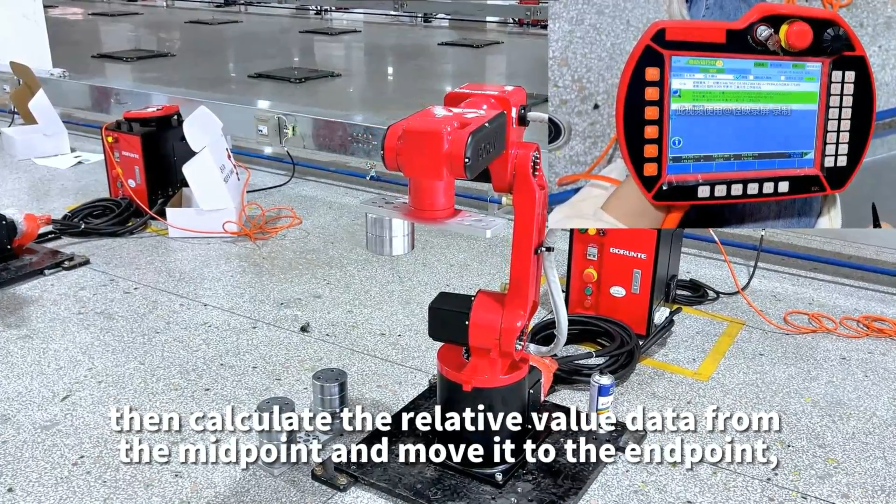We can see the robot moves to the midpoint by calculating relative values from the starting point. Then it calculates the relative value data from the midpoint and moves to the endpoint. This is the operation of relative posture curve line. It should be noted that, when using relative posture line or relative joint instruction, if the robot stops midway and restarts, it will continue to move the set relative instruction value.

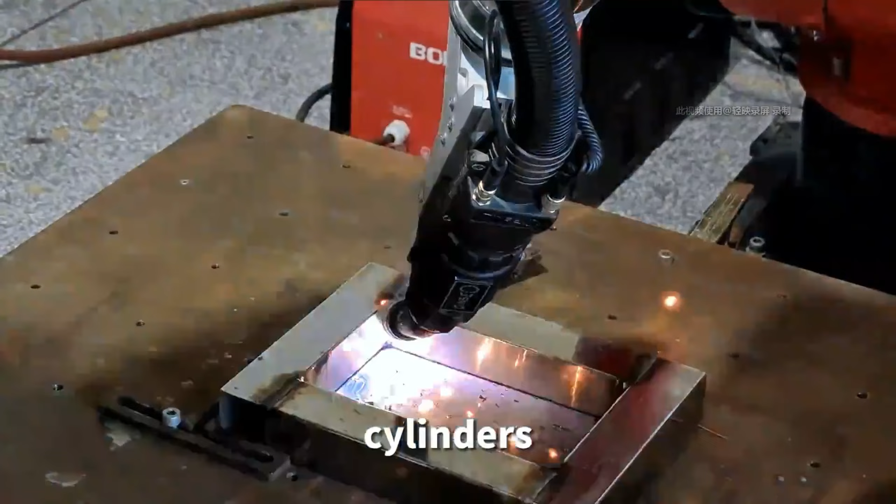Using the stop position as a reference point. The tool coordinate is based on the tool center point as the 0 point. The robot trajectory will move with reference to the tool center point, because robots often install suction cups, welding guns, cylinders, and other tools on the flange during actual movement. Taking the welding gun as an example, its structure is generally curved, so for the convenience of programming, we need to set a tool coordinate system for it. After setting up, we can easily use the end of the welding gun as the origin for programming and better edit the trajectory path.

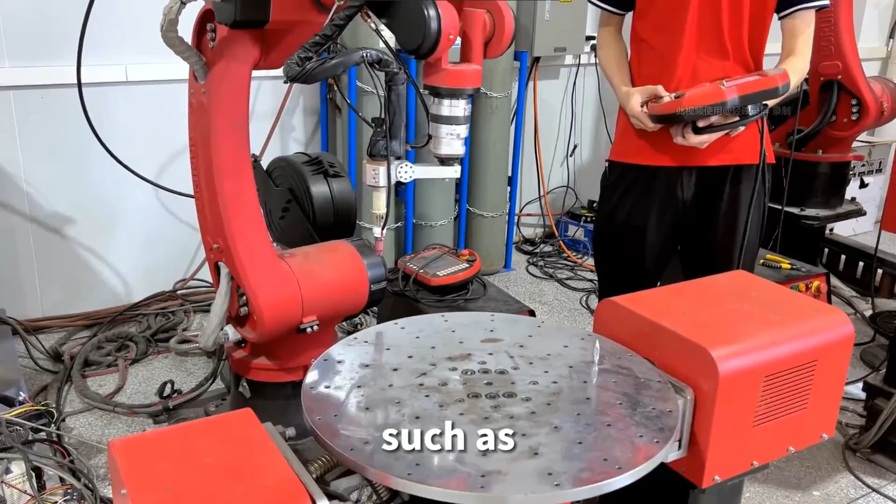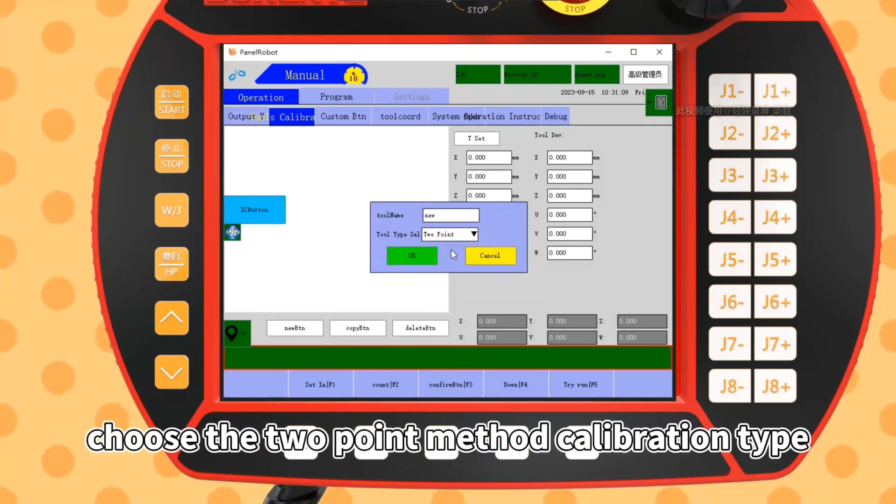There are various methods for calibrating tool coordinates, such as 2-point method, 3-point method, 6-point method, and 23-point. We will provide a detailed explanation in the following classes. The 2-point calibration method can only be used when the coordinate values of the tool in the flange coordinate system are known. Click Operation and Tool Calibration. Here we can edit and modify the established tool coordinates and create a new tool calibration. After establishing the name, choose the 2-point method calibration type. Click on the newly created tool and enter the calibration interface.

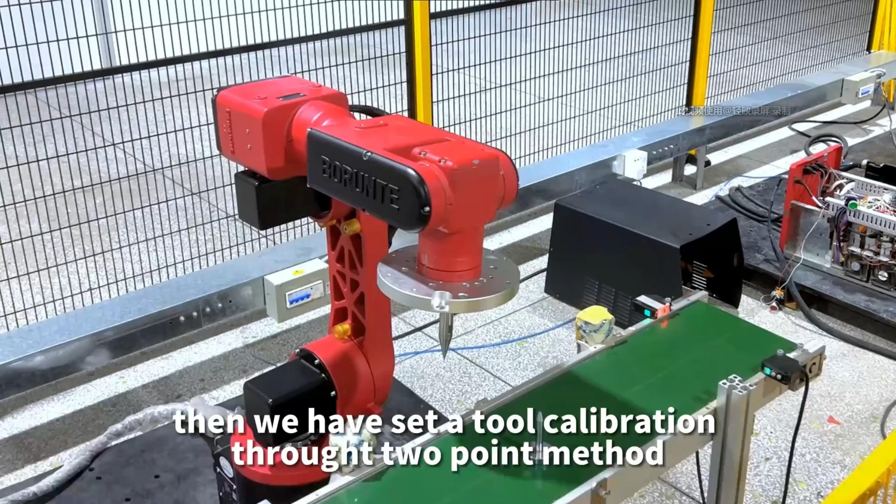First, move the robot to the origin point and click T-set. Next, input the values measured in the XYZ direction from the end of the tool to the center point of the flange into the tool deviation. Click Count and Save. Then we have set a tool calibration through 2-point method. It should be noted that 2-point method is only suitable for low precision situations.

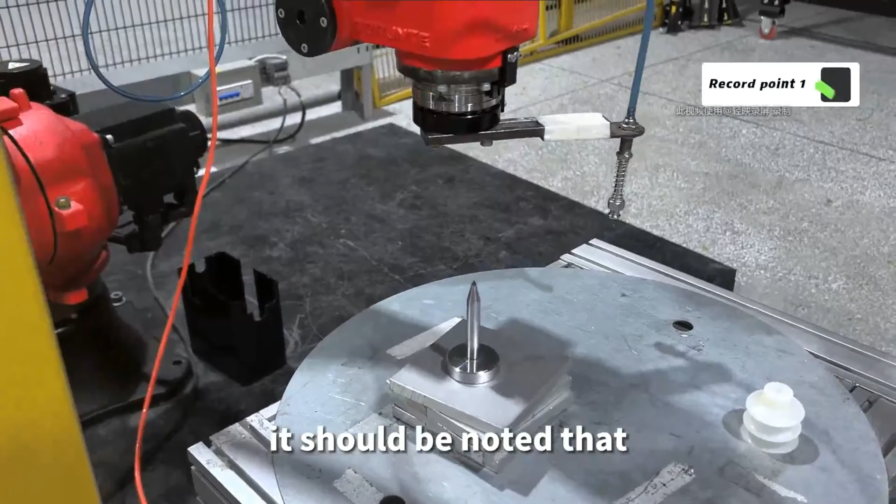3-point calibration method is generally used for tool calibration of 4-axis robots, calculated from 3 posture points 0, 1, and 2 with a pose angle greater than 30 and a tool end infinitely close to the reference point. Create a new tool calibration and choose 3-point calibration method. We can see on the right are the points 0, 1, and 2 that we need to record. Record 3 points through programming. It should be noted that the posture angle must be greater than 30. After recording each point, click Count and Save. Then we have set a tool calibration through 3-point method.

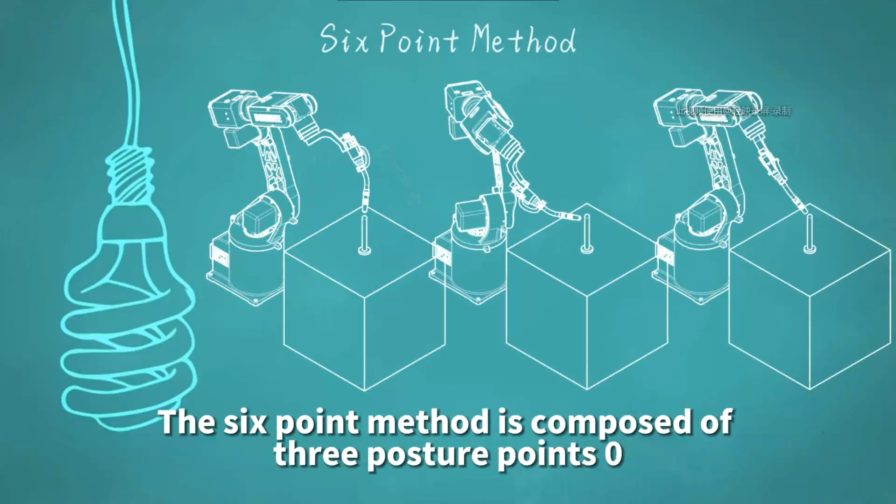6-point method is a commonly used tool coordinate calibration method for 6-axis robots. This method requires selecting a reference tip and recording 6 points to calculate the tool coordinates. The 6-point method is composed of 3 posture points 0, 1, and 2 with attitude angles greater than 30 to each other, and tool tip infinitely close to the reference tip, and a posture point with tool z-axis parallel to the world z-axis, and tool tip infinitely close to the reference tip A, as well as 2 points B and C in the x-axis and y-axis directions with the same posture at reference point A.

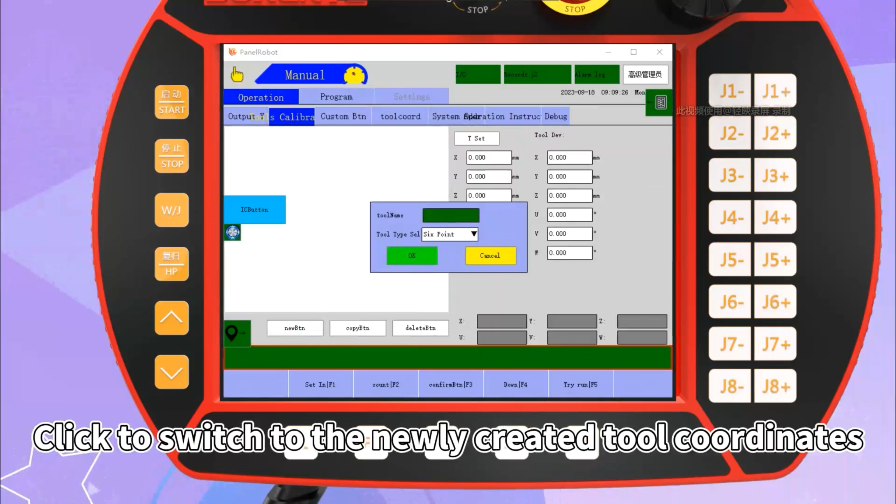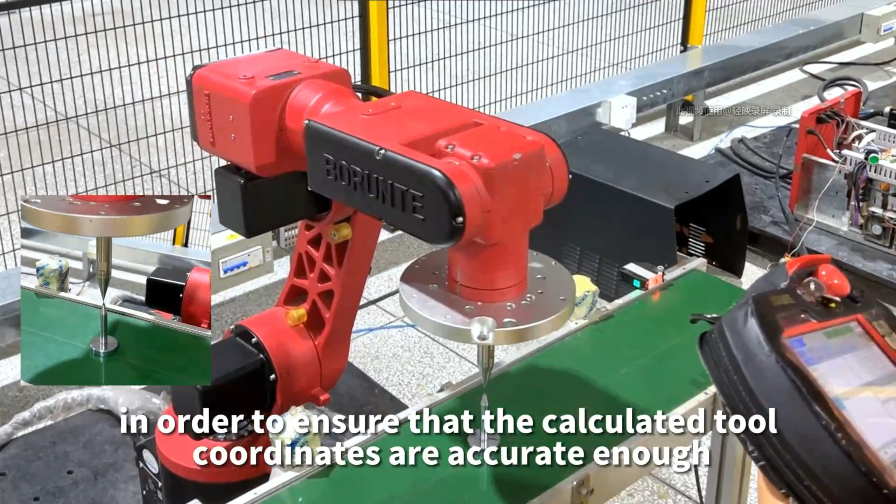Let's demonstrate how to create a tool coordinate in 6-point method calibration. Click to switch to the newly created tool coordinates. We can see on the right are the points 0, 1, 2 and points A, B, C we introduced earlier. Turn to the manual mode. Record 6 points through world coordinates. It should be noted that the tool end should be infinitely close to the calibration point in order to ensure that the calculated tool coordinates are accurate enough. Be careful when handling to avoid colliding with the robot. After recording 6 points, click Count and Save. Then we have set a tool calibration through 6-point method.